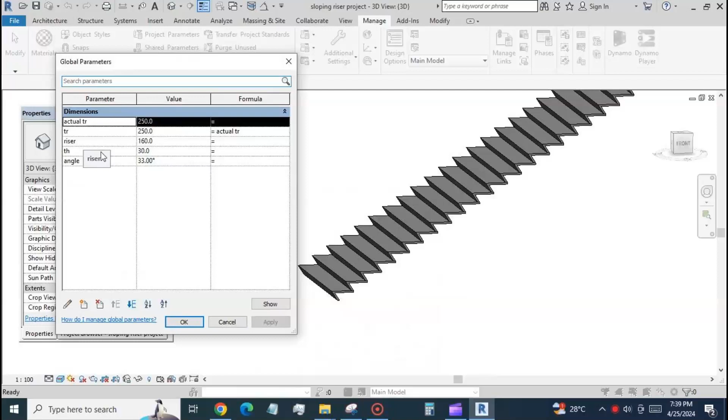We will create a sloping riser in this video. This will be like a normal Revit staircase where the width and thickness of the tread and riser can be changed, and in addition to that the angle of the slant can also be changed.

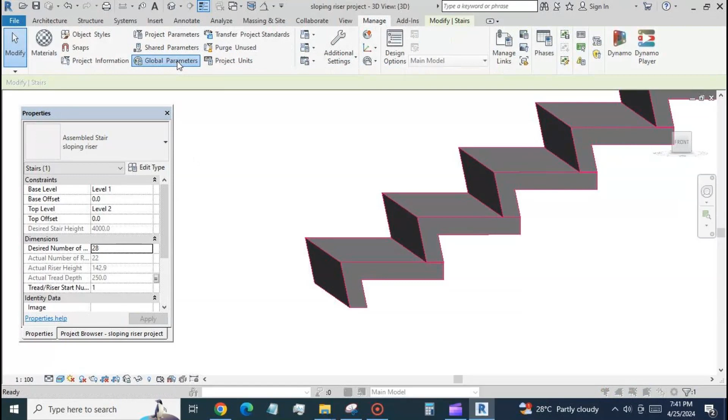Create a new file metric profile type.

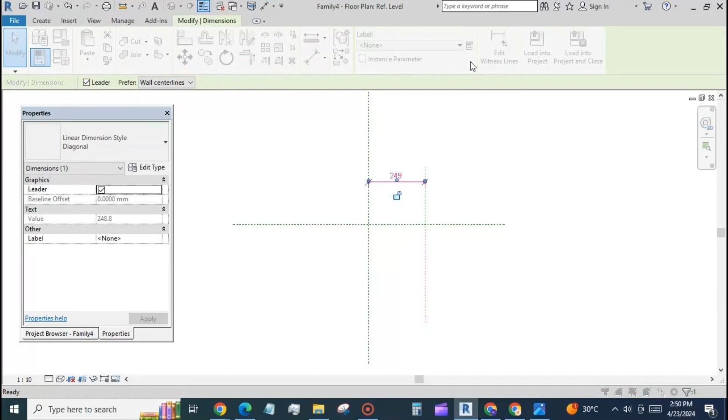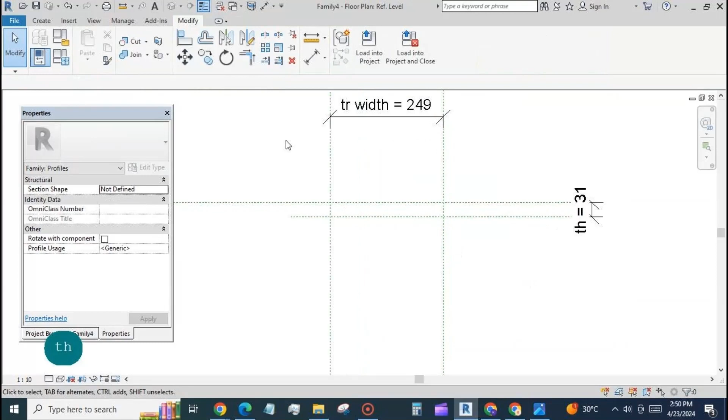At the reference level, place reference planes as shown here. Create new parameters for the tread width and thickness. Place a rectangle and lock all the 4 sides.

We will be loading this into the project file. At the reference level we will place a stair and let's increase its width.

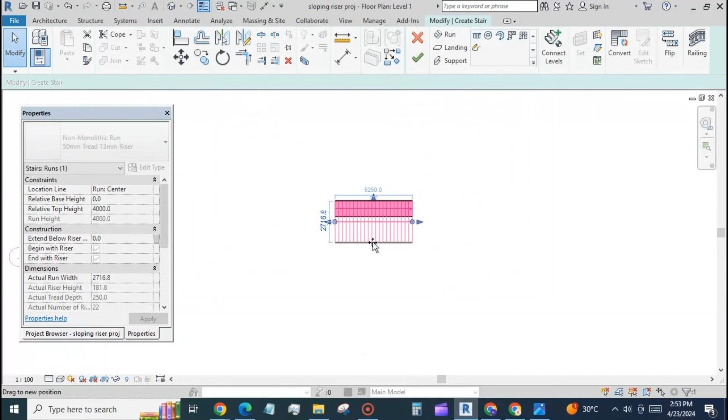Delete the railings and hold the stair and duplicate it. Give a name to it.

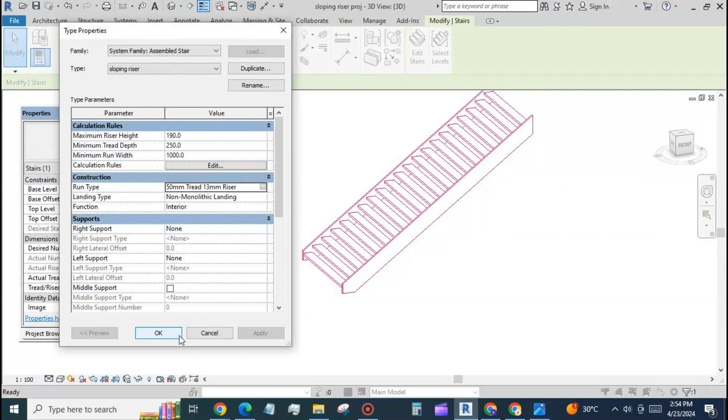Change the right and left supports to none, and in the Run Type menu uncheck the riser box. This tread is the default one. Go back and load the one that we made.

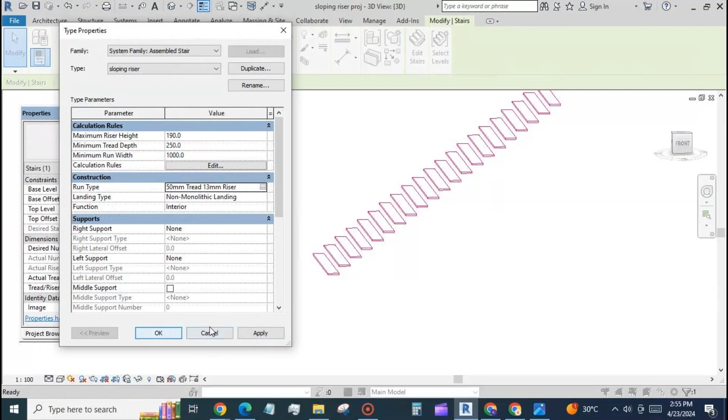Open the Run Type again and change the tread profile to the one that we just loaded. Open Families menu, and in the profiles we have this profile that we loaded.

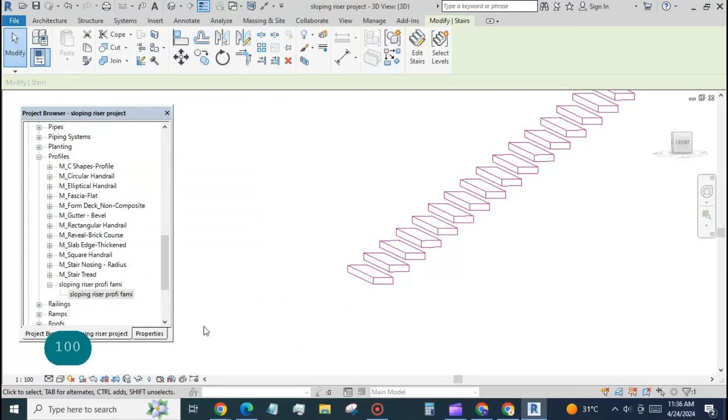Hold the stair and assign a parameter to the tread width. Also associate a width parameter to the profile that we loaded. In the global parameters, equate the 2 tread widths.

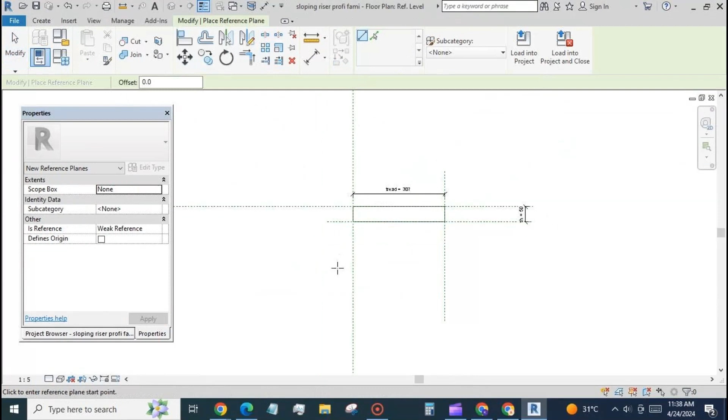In the profile family, make 2 reference planes and create parameters for tread width and height.

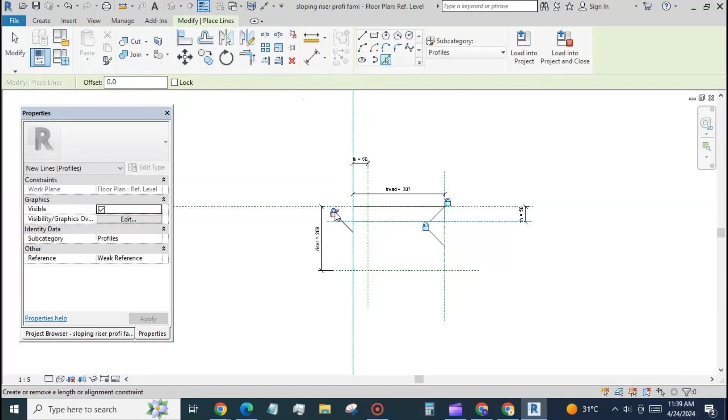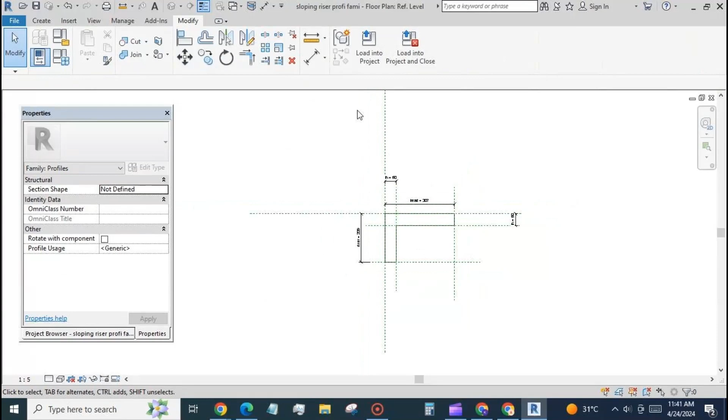Make a rectangle lock on all 4 sides and trim to create an L-shaped tread. Load this again into the project file. And associate the riser height with a parameter.

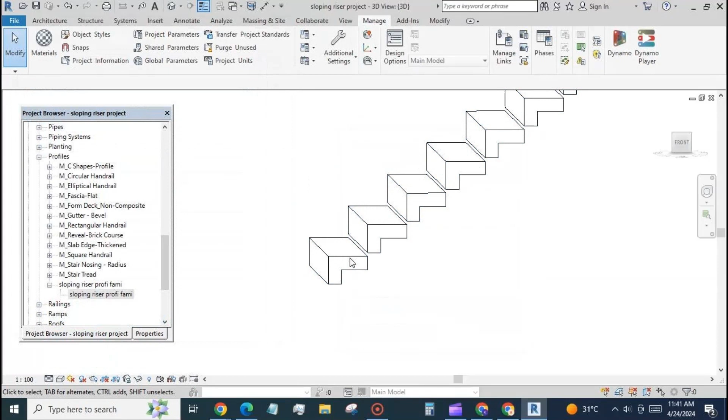The riser height should be same as the actual riser height. Also associate the thickness of the tread with a new parameter.

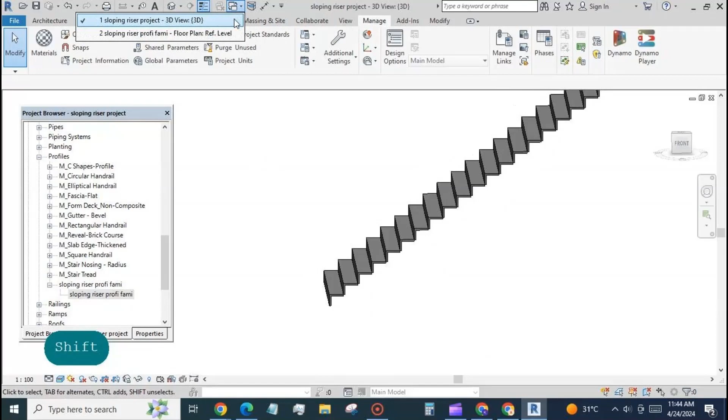Go back to the profile and delete the riser sides and make a line at an angle as shown. Place an angular parameter between the ref plane and the slanting line.

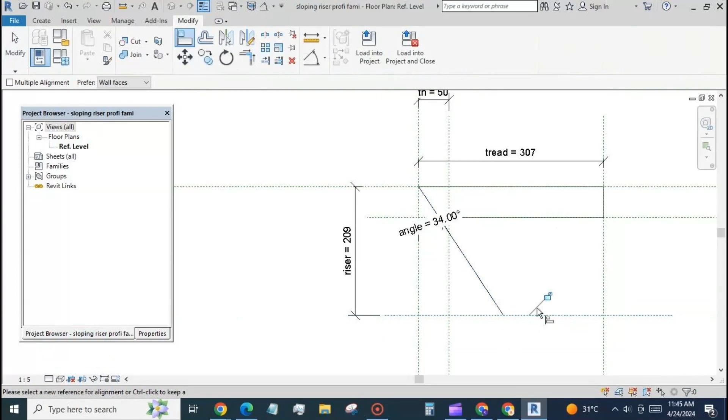And create a new angular parameter. Align the endpoint of the line to the reference plane and lock.

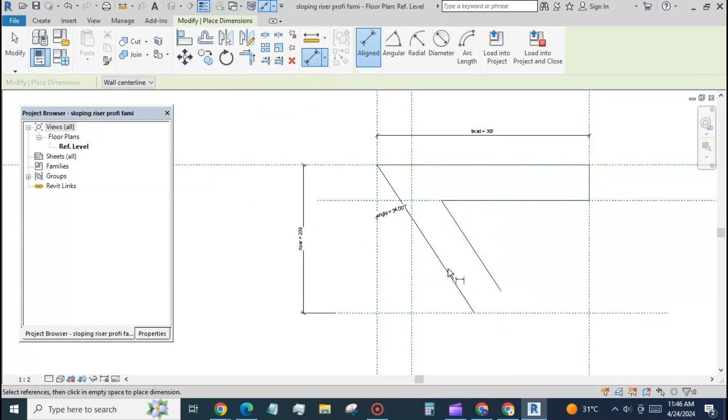Place another line parallel to this line and trim the line with the upper horizontal line. Place an aligned dimension and assign the thickness parameter between the 2 lines. And lock the endpoint to the ref plane.

Join the 2 parallel lines with a line.

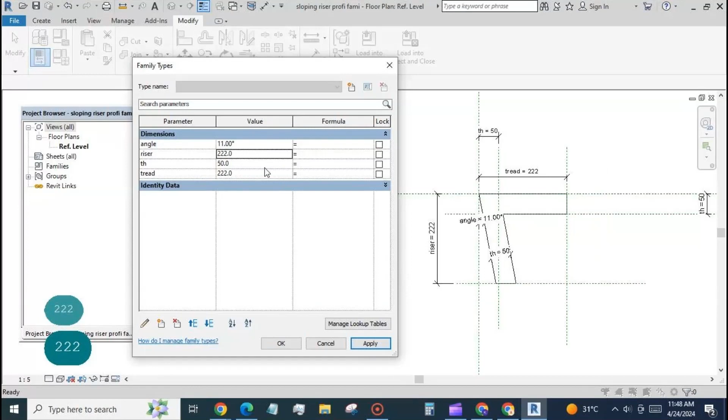Check to see if all the parameters are working.

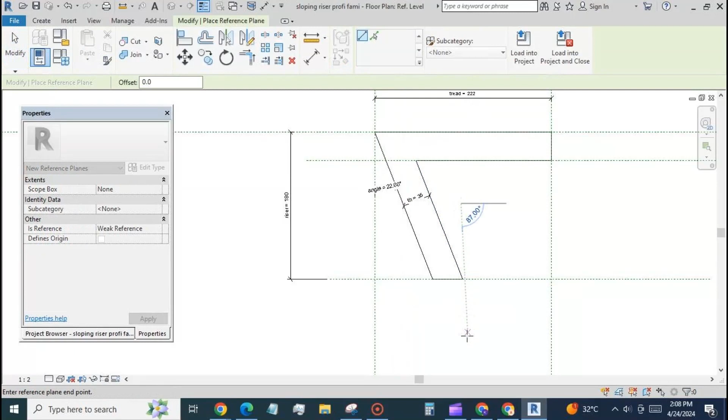Place a reference plane at the endpoint of the second parallel line. Place an aligned dimension as shown. Create a parameter. This is the distance by which the end of the riser is shifted.

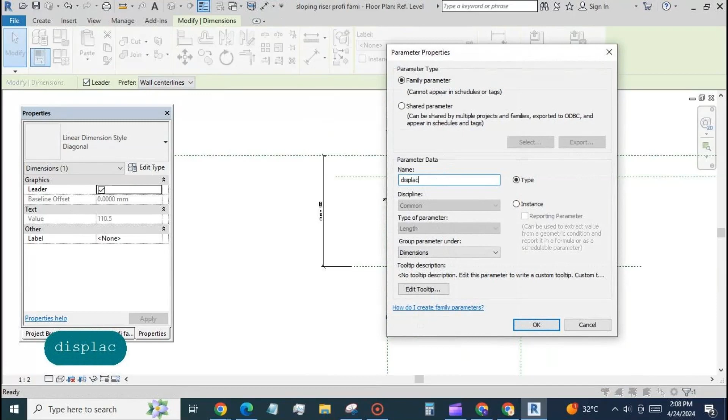Place another plane at the same distance after the tread. The tread has to be increased by this displace distance so that there is no gap between the riser and the tread.

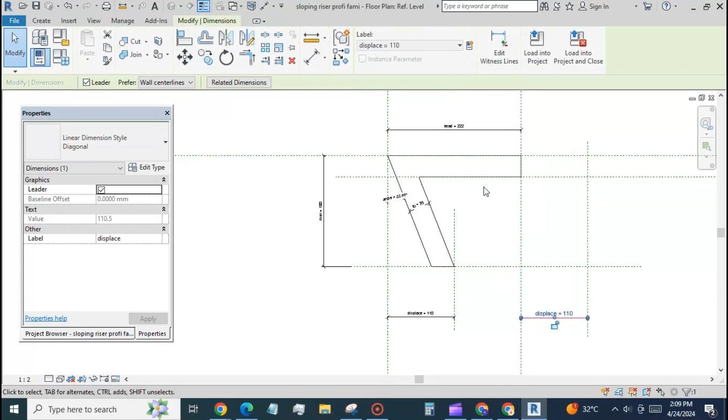Align the side of the tread to this line and lock.

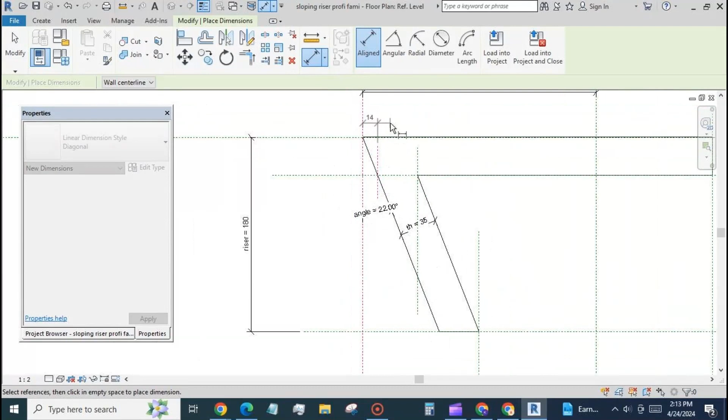Place some ref planes to work out the value for the displace.

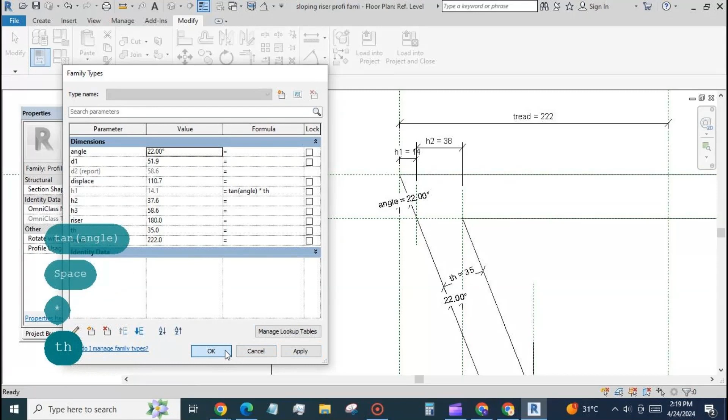Use geometry to find out the distance equal to the parameter displace.

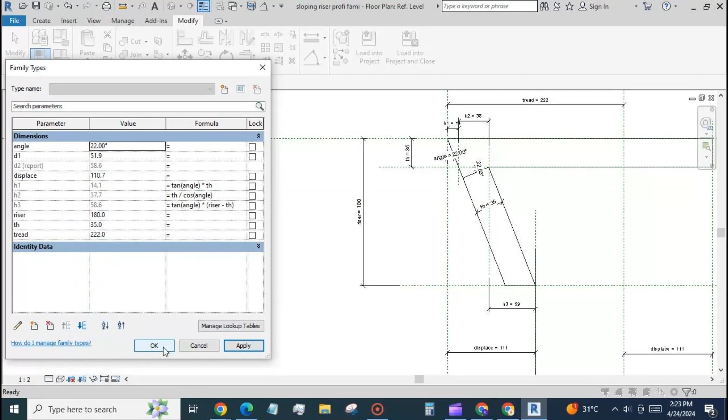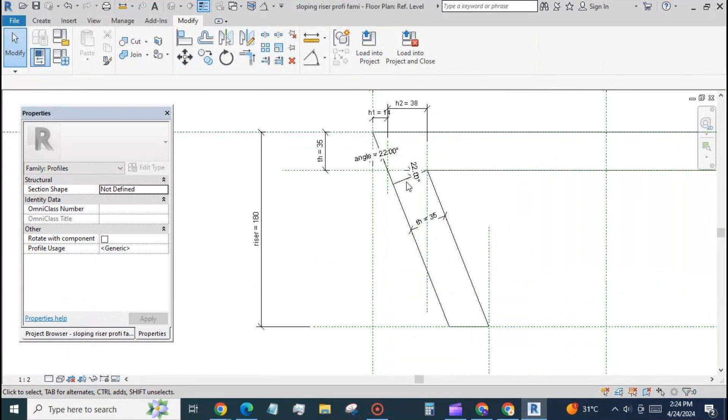Remove any extra lines. The profile should be one continuous closed curve line, otherwise the profile will not show in the other file.

Check if all parameters are working well.

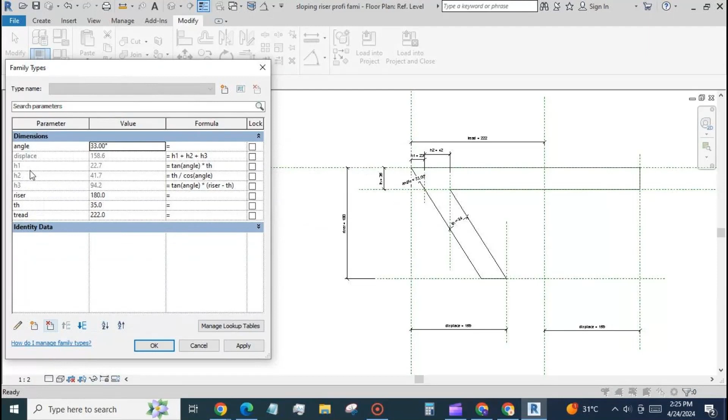Load the file into the project file.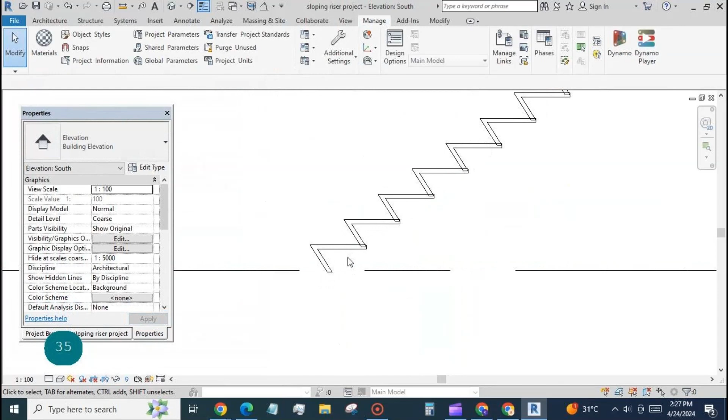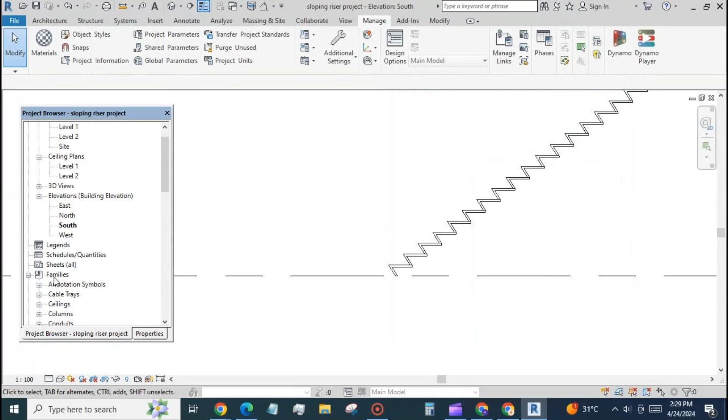Make the riser equal to the actual riser height of the stair. Create a parameter for the angle.

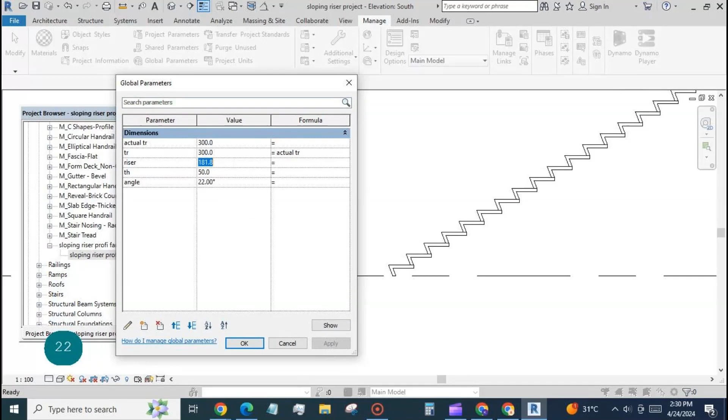Make sure to get the tread and riser from the properties by holding the stair.

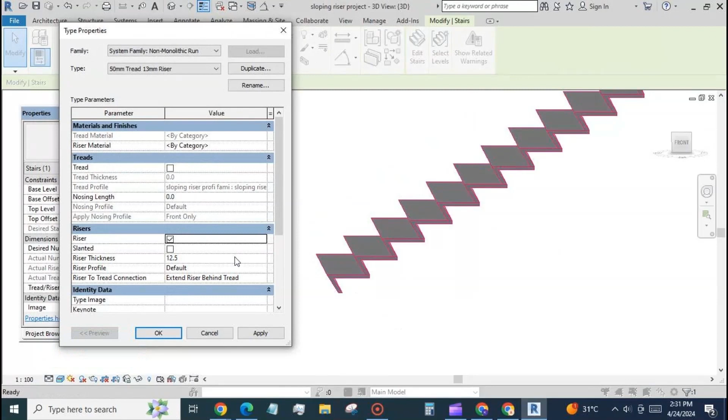The same profile can be used for the riser when the tread is unchecked.